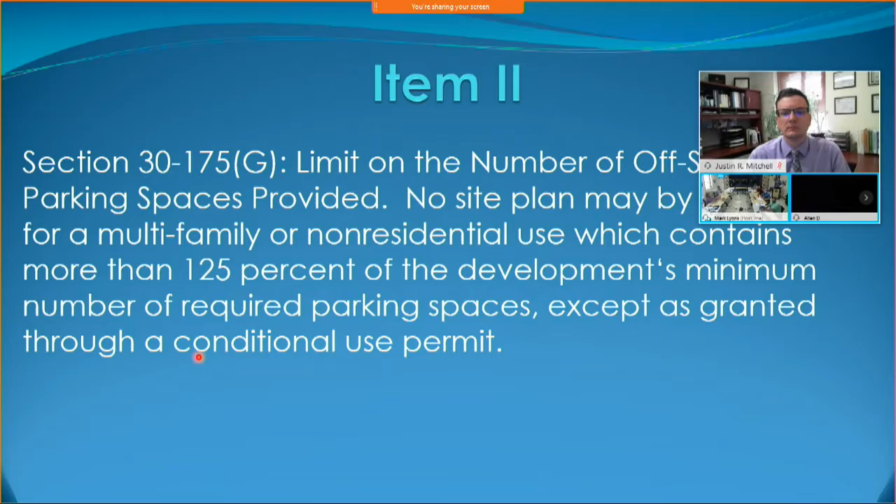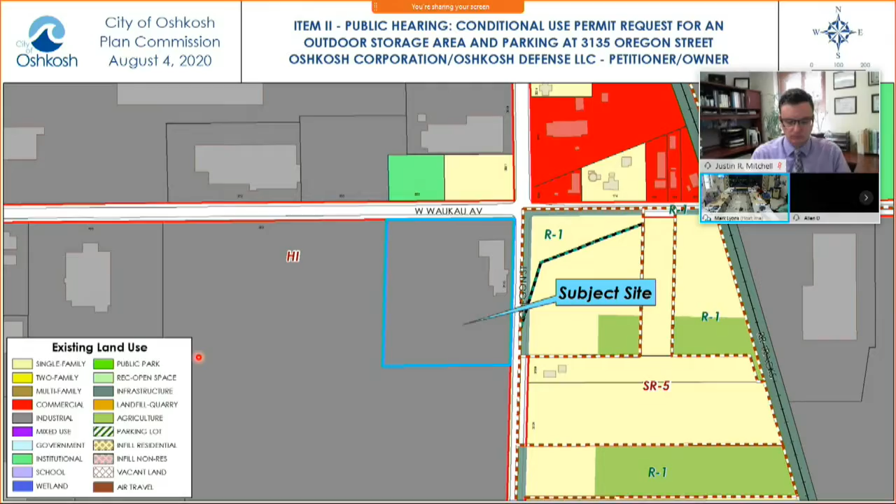You can see an aerial of the subject site here in blue, and just to the west there's a lot of vehicle storage on the property immediately west of it, plus the office building, existing parking and storage area on the subject site. You can see how it is accessed from West Waukau Avenue and also from Oregon Street.

There is about a 13,000 square foot office building, with associated parking spaces and storage. The office building includes a fairly sized conference room that attracts a lot of clients, and their on-site traffic expands when that room is in use. They use the storage space as an area to display their products and vehicles for clients when they're there, so they are looking to expand that.

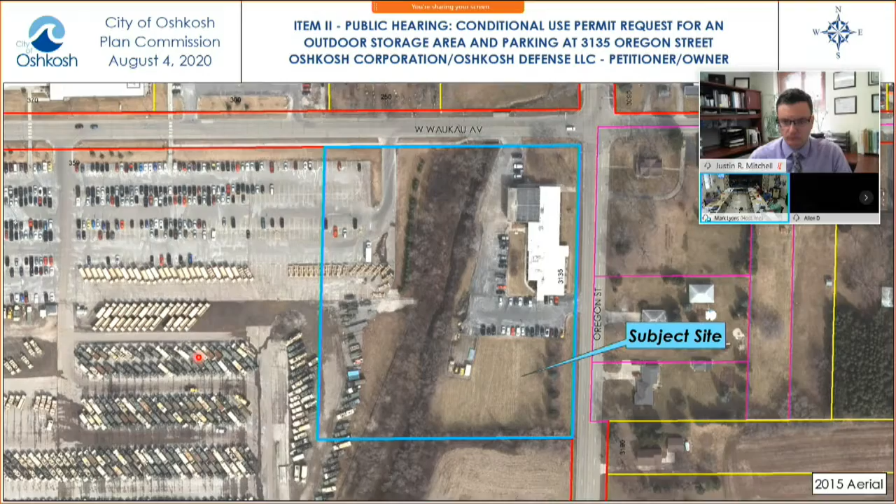This came before staff before - it came last year as a CUP request to expand this parking and storage area. They withdrew it because they did not have all of their plans finalized. So they are coming back to us now formally.

So you can see the proposed plan here. They are looking to add about 6,300 square feet of gravel storage area, kind of where the red pointer is there. They're also proposing to add 43 spaces of surface parking just to the east of that storage expansion. They would remove 3 parking spaces in the existing parking area, but reconfigure a small portion of that area, so they will have a net increase of 40 spaces.

They are adding approximately 20,360 square feet of impervious surface area to the site, so it is a noteworthy amount. Despite that, they do still stay under the industrial covenant maximum of 60% and the zoning maximum of 70% for the heavy industrial zone parcel in question. So they are okay on impervious surface area.

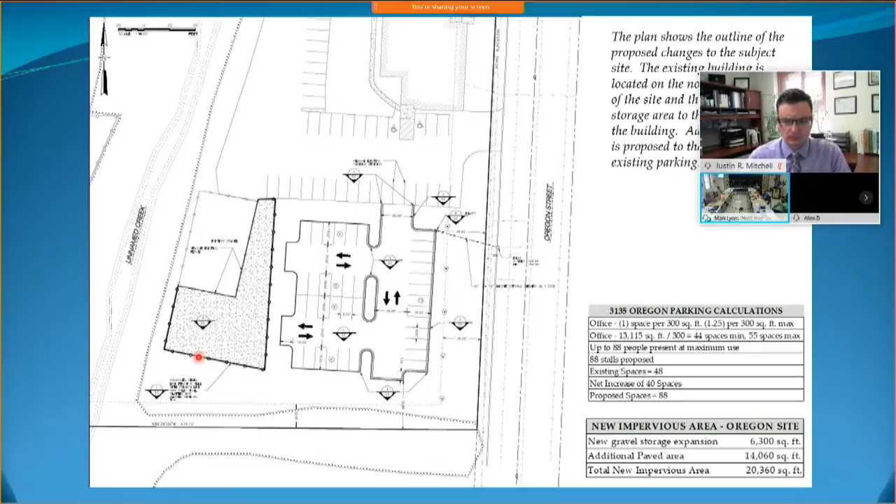As far as traffic patterns, those will not change, except that they will remove a few stalls to get into that new parking area there. Their access drives will stay the same.

As far as screening, they have to enclose that storage area with a solid 8-foot tall fence. What they proposed does not meet code at this point - the solid section of the fence stops below the 8-foot mark. So they are going to have to resubmit a code compliant fencing detail. That's one concern that we have.

As I mentioned, the reason they're adding so many parking spaces is really to accommodate the increased traffic when that conference room is in session. They say that adding those spaces to the site will mitigate any parking on the grass or in other non-designated parking areas.

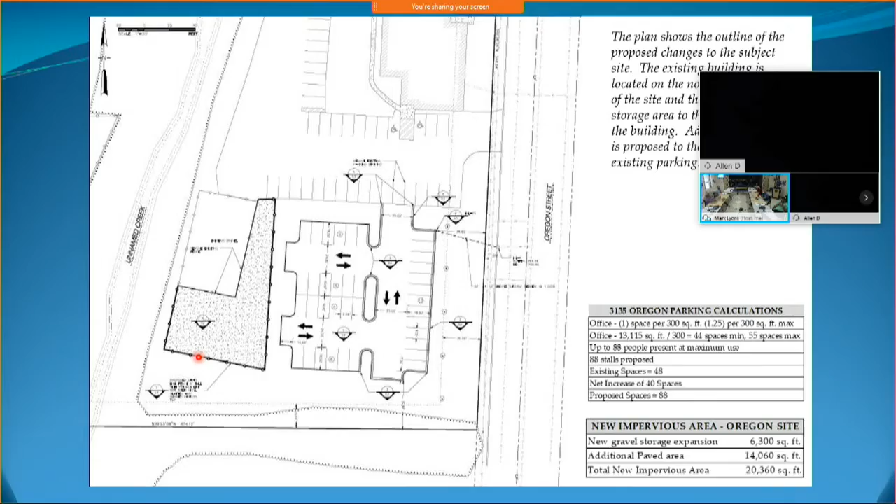Moving on to landscaping, they are code compliant with what they're proposing now, except for yard landscaping. You can see in red there the table from the staff report we put in the presentation - they have to provide points for the gravel storage expansion. For every 1,000 square feet of building or storage expansion, they have to account for that with yard landscaping. They are proposing paved area landscaping and street frontage landscaping, and they're okay there - they meet code, just not with yard landscaping yet. So they are going to have to submit a revised landscaping plan that accounts for the yard points they need to add.

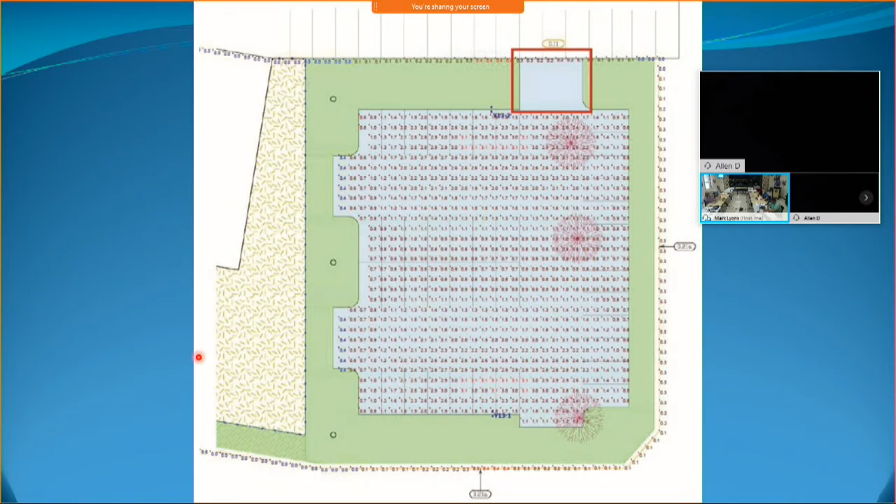Moving on to photometrics, their lighting plan for the parking area actually meets code, and from what I could tell, it meets code in all places except for that red area there. At the access to that parking area, they're not showing the values for a lot of that. And the values between the access drive and the existing parking edge there, those I think are below the minimum code requirements. So they are going to have to submit a revised photometric plan showing all of the information and that it is code compliant. Obviously we can't grant any base standards because it is a CUP.

Before I get into the recommendation, just want to mention for signage and building facades, no changes are proposed, so we have nothing to worry about there at this point. And for stormwater management, they are going to have to do a full stormwater review, as far as I remember, because they are adding a good amount of impervious surface to the site. That will be required as part of the site plan review process.

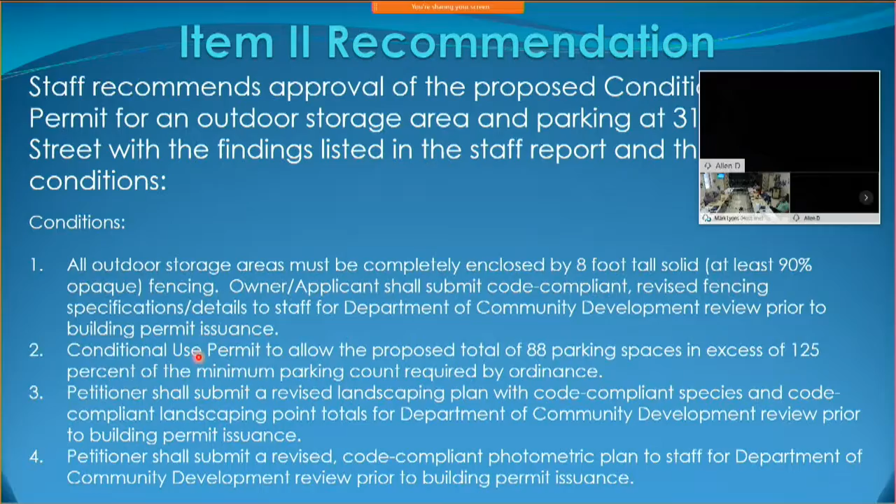With that, we are supportive of the CUP request for this outdoor storage area and parking expansion, as long as they meet these conditions: the 8-foot tall solid fencing with submitted revised details, a CUP to allow for the total of 88 parking spaces in excess of the 125% minimum parking count, a revised landscaping plan with code compliant points and species for yard landscaping in particular, and a revised code compliant photometric plan. That's all I have on that one.

Okay, technical questions, Plan Commission? Phil or Justin, any technical questions?

I was a bit surprised that gravel is permitted for this storage. It is still for outdoor storage. The idea is that it's just a storage area and not a surface parking lot that is publicly used, so we don't require it to meet the same standards as a publicly accessible lot.

Correct. Storage has always been permitted to have a gravel base and does not have to be paved. A lot of industrial uses and the things they're storing, whether vehicles or large piping, are more conducive to being stored on gravel than paving it and beating that pavement up. But for stormwater calculation purposes, gravel still constitutes impervious surface and has to be accounted for in stormwater management plans.

Any other technical questions? Yeah, I've got two. There's a waterway along the west border, is that correct? Let me go back here. The unnamed creek on the map. Yeah, I believe there is some sort of wetland or water feature on the western edge of the site.

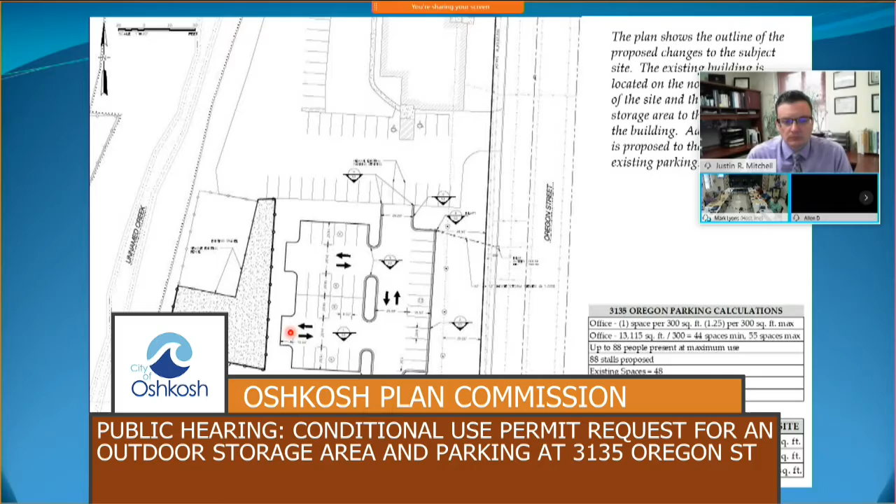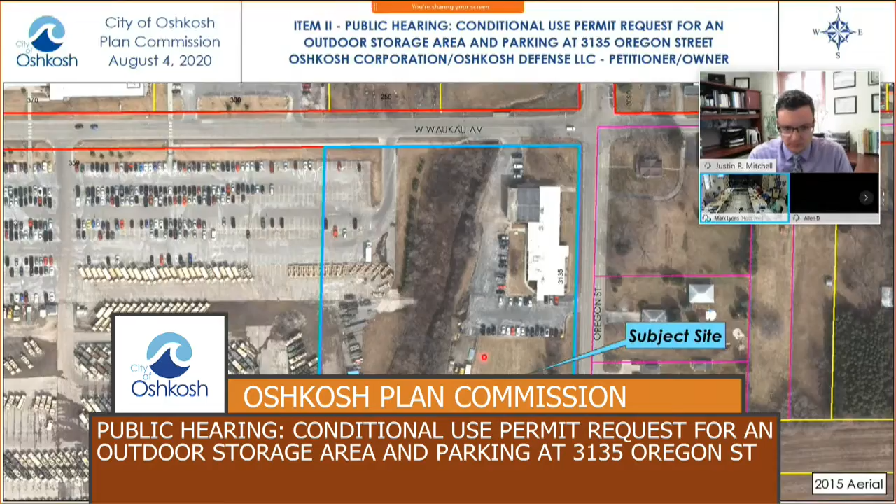Do you know if they're planning to leave those trees along Oregon? Yes, if you could go to their landscape plan - you can see those same trees show up in the aerial for their perimeter landscaping. So it looks like their intent is to leave those large mature trees. They actually get additional points for leaving them. The improvements will be fit behind those, with the storage area for the parking lot.

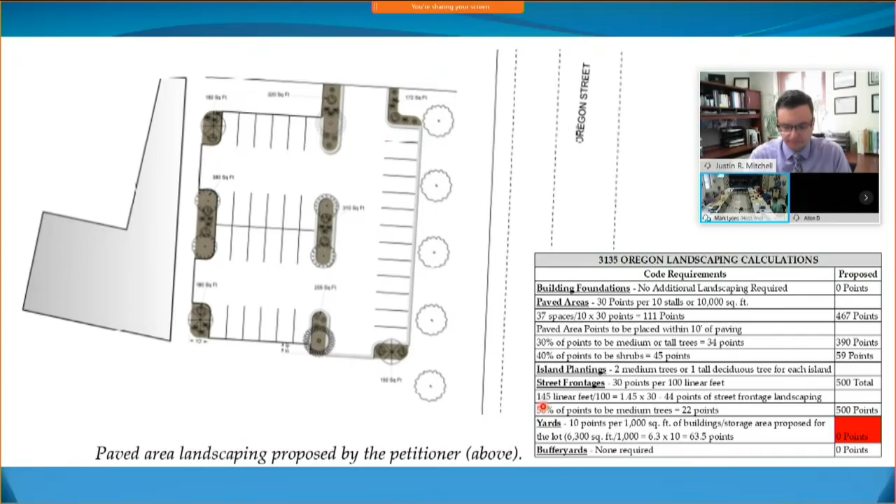Okay, any other questions? All right, we open the public hearing and request a statement from the applicant. The applicant is not here, is that correct? Does not look like we have the applicant here today. Is there anyone else here to speak on this item? No? Back to the commission. We close the public hearing.

We need a motion. Motion to adopt findings and recommendations as stated in the staff report. Second. Any discussion? Seeing none, we'll call the roll. Perry, aye. Marshall, aye. Hintz, aye. Davy, aye. Ford, aye. Kiefer, aye. Mitchell, aye. Prop, aye. Carries 8-0.

Next item is number 4, public hearing. First we need to officially take action on number 3. Notices were sent out that we were going to have this meeting, so we need to take some sort of formal action. Staff has been continuing to work with the applicant on a couple outstanding items and felt it was in the best interest to have this laid over. They agreed, but we had already made the notice, so we do have to be here today. So we just ask for a motion to lay it over.

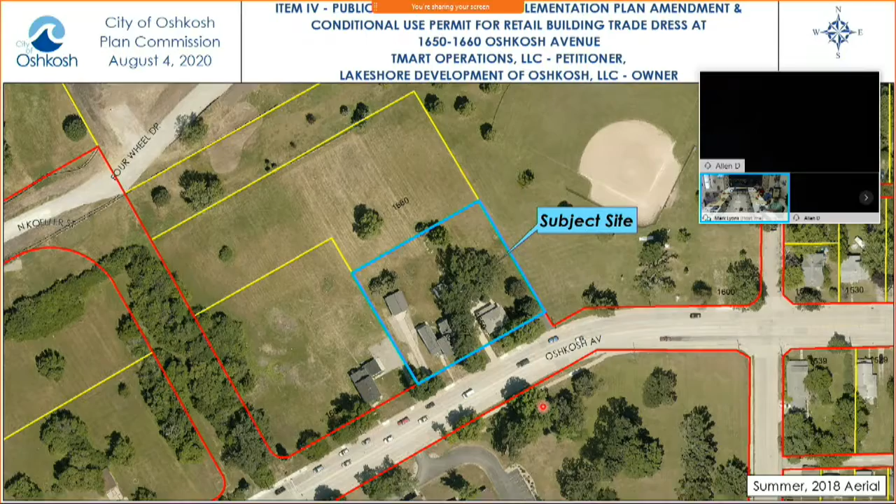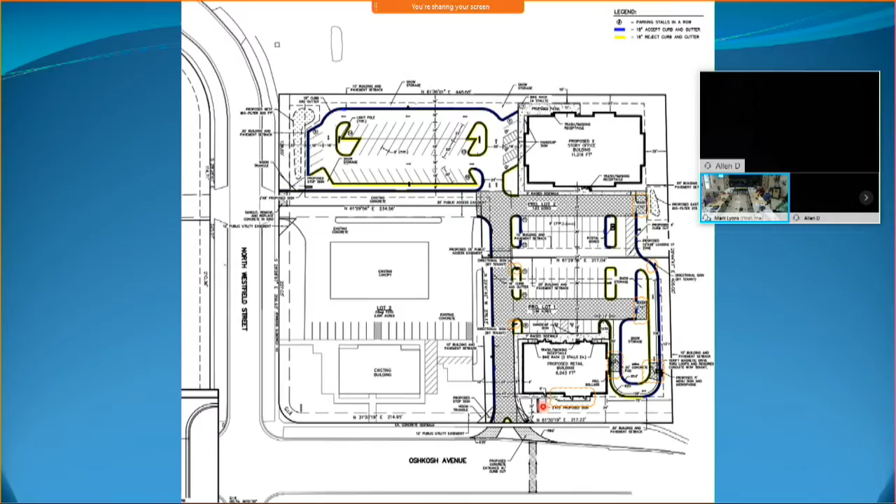So here's their site plan, which includes a few minor revisions. All the changes they're proposing meet the zoning ordinance standards, and there's no increase in impervious surface. They're also showing a minor change in the landscape plan. On the north side of the building, they are moving some of the building foundation shrubs to the east and west sides to accommodate a bike rack near that entrance.

So this request is for an SIP amendment and a conditional use permit for trade dress. Their building facades will include trade dress. It also includes signage for both Dunkin' Donuts and Baskin Robbins. So the SIP approval required that they meet the corporate business park standard of 15% maximum wall signage area per facade and maximum of 1 square foot per linear foot of building frontage per facade.

As you can see here on the north and south facades, the Dunkin' Donuts and Baskin Robbins wall signage does eat up a large portion of their allowed 101 square feet of signage, which is the linear footage. And their plans do show the signage for the future tenant to exceed what the remainder is left for allowable signage. So we did want to make a note that they will be held to the 1 square foot per linear foot for wall signage. So the future tenant will need to meet that standard.

And they are proposing trade dress, which includes some class 3 materials, which will be colored metal banding, fiber cement panels, fiber cement siding. So the trade dress does require a conditional use permit, as was required in the corporate business park. So all facades still do meet the 75% class 1 material requirement.

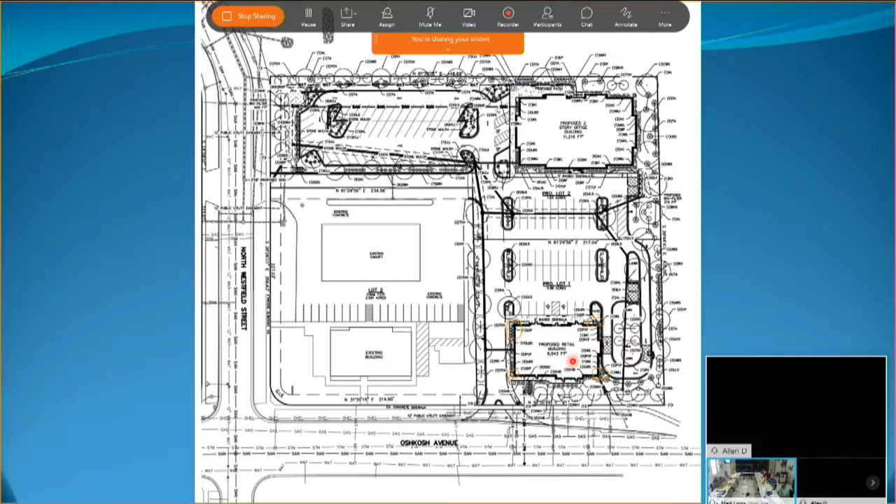East would be, I guess, if you were standing in Mary Jewell Park, that's the facade you would see. Obviously there's landscaping and a drive-through between those, but that is the facade that would face directly at Mary Jewell Park. It's gonna be tough to see unless you come right on top of it, in my opinion, but it's there.

Okay, any more technical questions?

Well, then we'll open the public hearing and request a statement from the applicant. Is there an applicant? Yep, right up here.

Name and address please. Mario Valentini, MRV Architects, 5105 Tollview Drive in Rolling Meadows, Illinois.

First, I'd like to say we appreciate the opportunity to come in front of the commission and talk about these requests that we're making. I think I'll just start by answering a few questions. First of all, the tenant space is a rectangular space. Both brands occupy the same rectangular space. When you walk into this restaurant, there's no divider between Dunkin' Donuts and Baskin Robbins. It's all the same frontline equipment. You walk up to the register, look at a menu board, and say, I want this from Dunkin' Donuts, and next to it you see all the available menu offerings for Baskin Robbins.

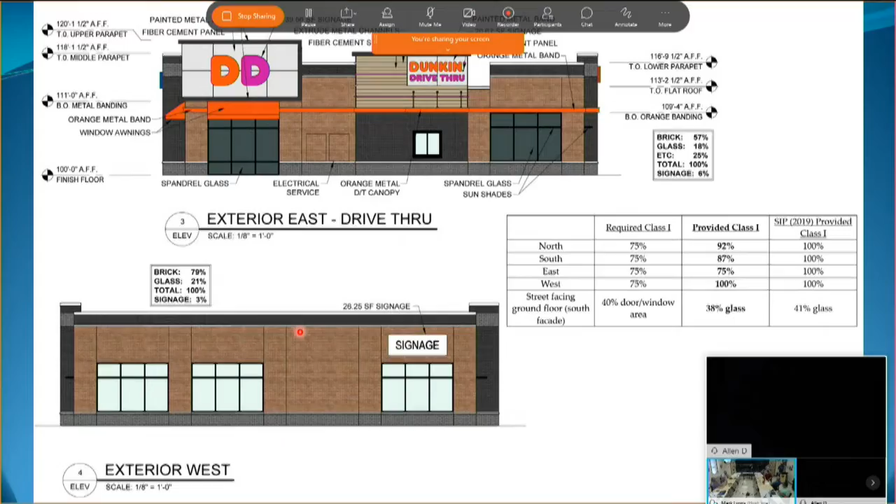If we could go to the other elevation, the east elevation is compliant, but the north and south elevations are not. If the Baskin Robbins signage wasn't there, the Dunkin' Donuts sign by itself wouldn't have an issue. It would meet the requirement based on the length of the leasable space without a problem. It's the addition of the Baskin Robbins sign that kicks us out altogether.

Personally, in speaking with the franchisee and the brand, they'd like to see the Baskin-Robbins signage as shown. However, we could offer a reduction of that signage. The logo, just like you saw on the drive-through side, where the Dunkin' can become DD, the Baskin-Robbins can also become just the BR, which would be the left portion of that logo. So we have the opportunity to reduce that a little bit if we can incorporate that.

My suggestion would be that in the ordinance we're requesting, the additional signage be only allowed for the business of Baskin-Robbins, not an approval to the shopping center, so that additional square footage doesn't become something Dunkin' could utilize. Say Baskin were to be removed for whatever reason, Dunkin' can't come back and request to use that additional square footage that Baskin was given. Or if Dunkin' and Baskin were removed after 20 years, the next tenant or any adjacent tenants don't get to use that square footage. It's literally only for the Baskin-Robbins, and as that portion of the business were to leave, so would the allowance for that additional square footage. If that's something that can be up for discussion, we'd like to request that as a possibility.

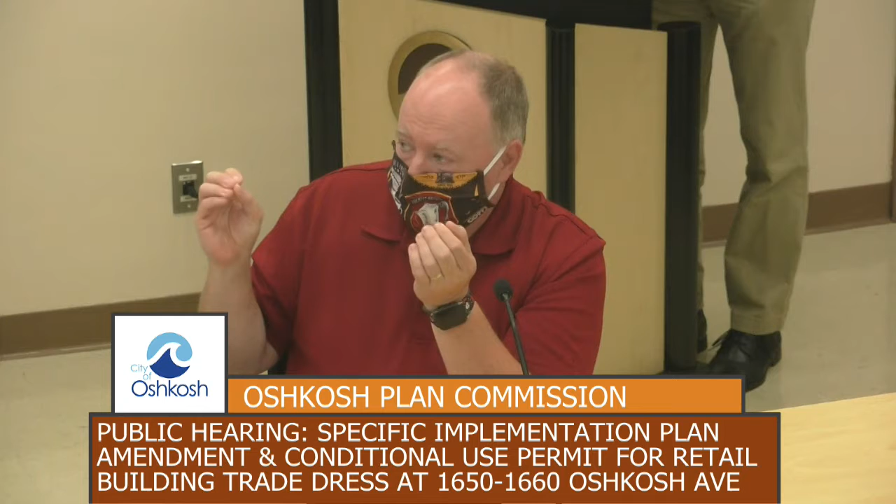I appreciate the dilemma caused by this, and I know there's a lot of commingling of like businesses or corporate all over the place. You see it with gas stations, you see it everywhere. It goes back to whether the orange stripe constitutes part of the sign because it's part of the brand, like the whole Buffalo Wild Wings thing. But ultimately, I view this as Mr. Hoopman and his partner's problem. If they sign a deal that has the sign space that they have, it's their issue to negotiate the other tenant spaces, saying there's a limitation to your signage here. It may help him, it may hurt him, but that's his ultimate business. We made it known that staff's not going to recommend approval of a variance to go above that.

Mike, I agree, I think that goes beyond our role here. I'm looking at the numbers, and they meet the Class 1 materials. Even if our intent was to treat these as 3 different buildings, that's not what we did. I think we have to go by the letter of it, and that's why city staff had to make that recommendation. I don't think that's our issue. I think that's a landlord issue, and we don't need to be doing their job for them.

But I do have a question for the applicant. How much of a problem would it be to get the street-facing ground floor south facade up to 41% from 38%? Is that a big deal? Is that the glass? Correct, that's the one place I see, below. Yeah, I don't think that's going to be an issue. Okay, again, we can work with it, it's their building, to accomplish what we need to accomplish, so I think we could do that.

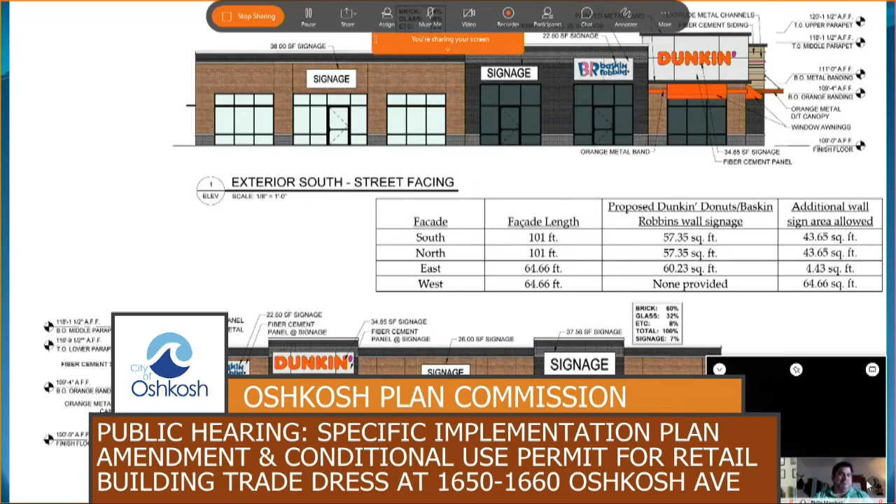Exactly. Okay, well, I just hadn't heard from tenants, and I hadn't heard from you, so I wanted to know. So, insider trading going on right now. I know, where's my WebEx? Bunch of stuff. Very good.

I guess since you're up there, sounds good. So I guess I'm trying to understand exactly what you're requesting.

So the idea would be requesting a base standard modification to increase the allowable signage on the total building, but only for the use of the Baskin-Robbins signage. We're not asking that the entire building get the additional square footage. We're just asking that the additional square footage only be utilized for the signage as a part of this presentation.

But I guess I'll go back to city staff - there's no, they're not violating any code here. Right now, because it's the only signage on the building, they're not violating anything. Chances are that second tenant space goes up, they put up a sign, again probably code compliant. It's that third tenant where we could get into issues - all of a sudden they've eaten up 90, there's 10 left.

Now, you could choose to add a base standard modification that essentially says we're going to allow 101 square feet of overall signage on that building, with specifically 10 feet, 9 point whatever, being allowed for this Baskin-Robbins sign.

Without getting into too many nuances of the code, how were these sign calculations done? Are those pin-mounted letters? Are they a raceway channel with letters mounted to it?

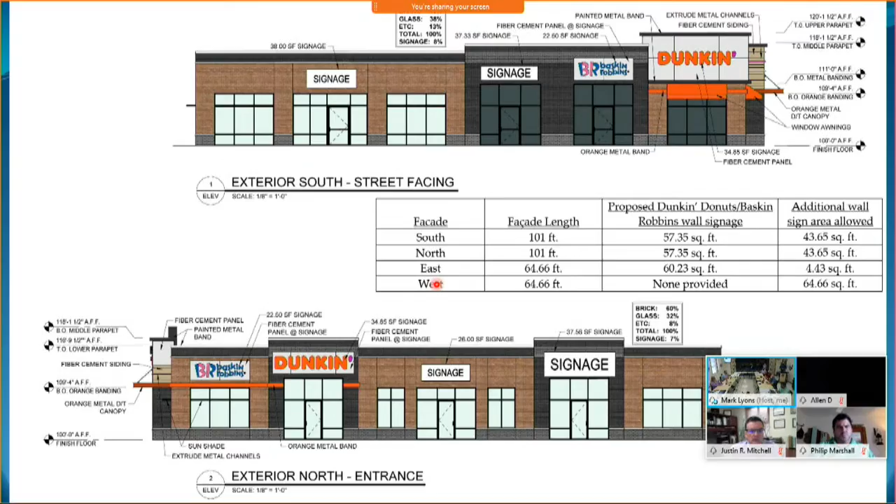Okay, Mike, you had a comment? John was on - did? Mark, where are we sitting then with those letters if we're recalculating? I'd have to be able to measure them out, because time matters.

Because as the one person who's actually installed signs on buildings like this, I was going to suggest - when you say there isn't room for this, I mean, you could do a simple - hold on, how wide is that sign right now with the Dunkin', what are we looking at? I think I can't find it on that sheet, that's why, and my glasses are fogging up from this, so.

I'm trying, anyway, you could do if there was a reduction in size of 3 inches all the way across, all of a sudden you're picking up a couple feet, is what I'm saying.

Yeah, potentially. That's how you make signs fit on buildings like this, where you have to fit them into a certain code. I know, because all over the state, every city is extremely different. So are we dealing with a fixed size letter that they only have one size that they make? Or could they actually come down 3 or 4 inches on the sign? It's still gonna be plenty visible, but you're gonna save yourself X amount of feet, because there are ways around this, especially for someone who has installed signs.

We completely understand that, and you have to remember this presentation is more about everything. I know it's come down to the one contentious item, which is the signage, but we didn't mean it to be that way, right?

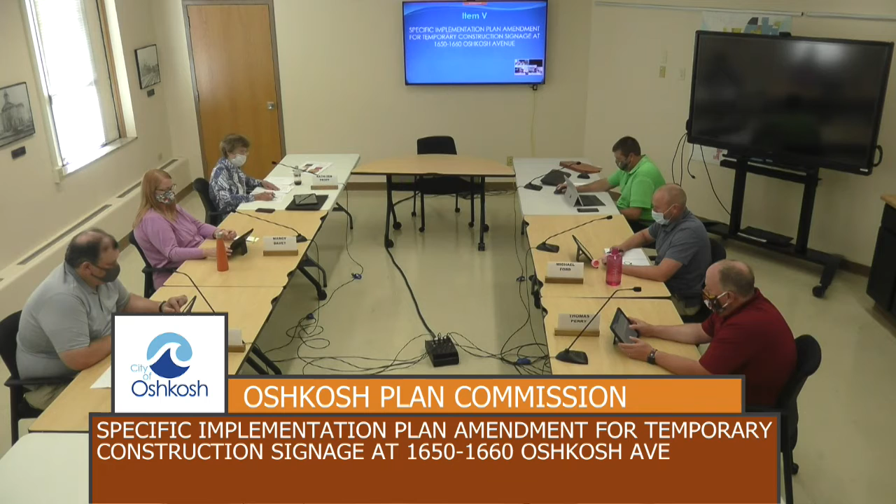Okay, we're on to item 5, which is a specific implementation plan amendment for temporary construction signs at the same site. Are there any site inspections? Drive by and look at the weeds. The chair will accept the staff report as part of the record. Go ahead, staff.

All right, so again, this is the same site. It also includes the future office site to the north. The applicant is requesting an SIP to allow for a base standard modification for 6-foot tall chain link fencing with their Ganther construction signage on it. They need that BSM because code does not allow signage to be affixed to fencing. Again, it will just be temporary fencing during construction, along the Oshkosh Ave and Westfield frontages. So staff does not have concerns with this.

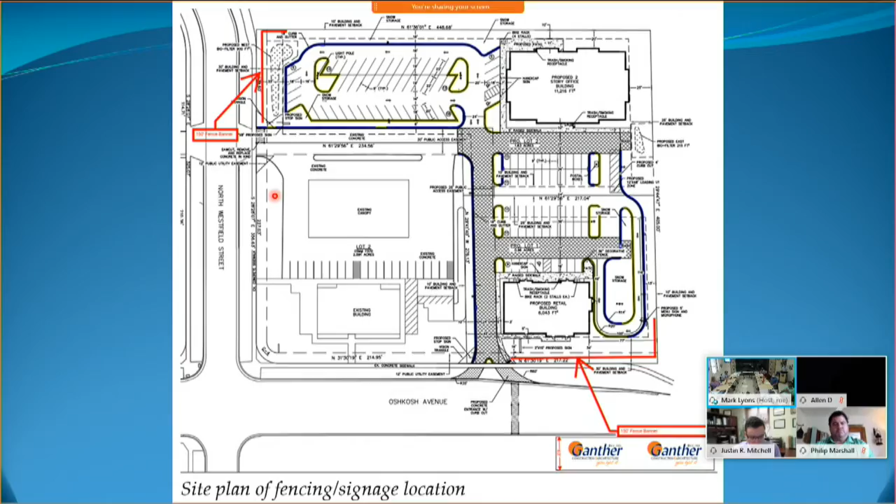We did something similar with the merge when they came through for their construction signage. So we are recommending approval of the SIP amendment with the condition that the construction fencing and signage may not be placed within the public right-of-way, and will only be there temporarily, and may only be displayed while the site is under construction. Okay, technical questions?

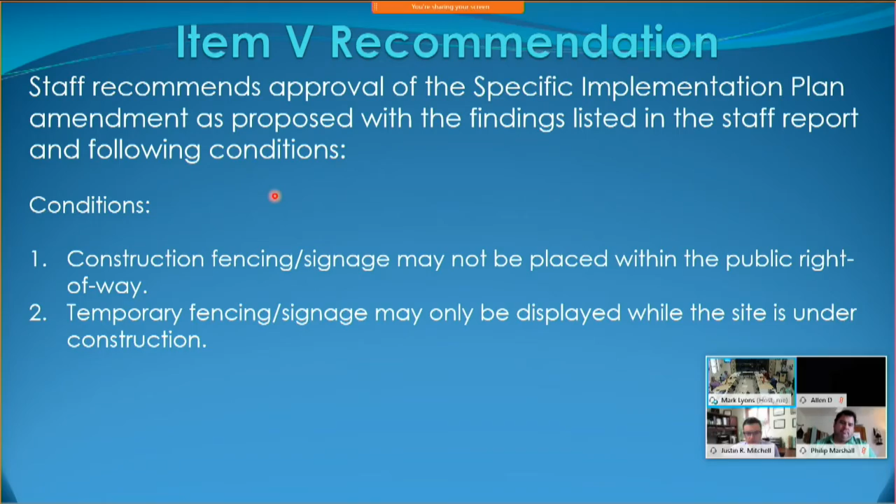Seeing none. We'll open public comment. Any comment from the public? Any public? Seeing none. Back to the commission, we'll close the public comment. The applicant is not here.

Motion to adopt findings and recommendations as stated in the staff report. Second. Thank you. Okay, discussion on the motion? Seeing none, we'll call the roll.

Perry, aye. Marshall, aye. Hintz, aye. Davy, aye. Ford, aye. Kiefer, aye. Mitchell, aye. Prop, aye. Carries 8-0.